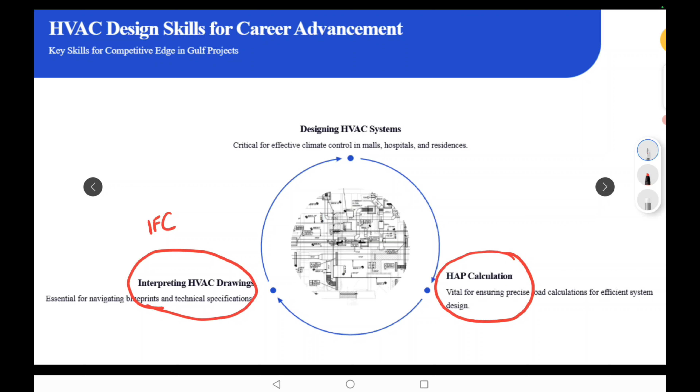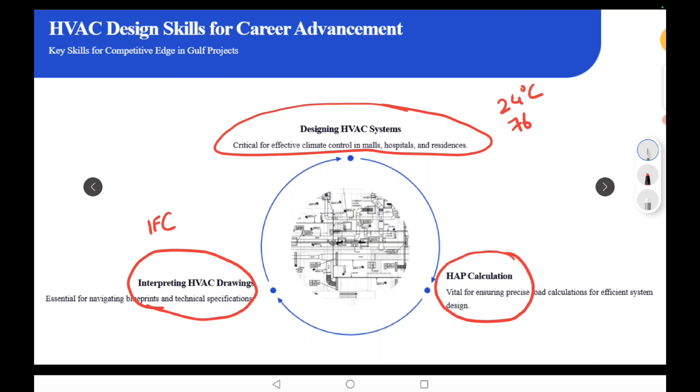The last stage for the drawing is called the issued for construction drawing, we call it IFC. Usually the comfort zone they specify is to maintain 24 degrees Celsius, or sometimes in Fahrenheit, 76 Fahrenheit, with humidity ranging at 50 plus or minus 5%. So there's a comfort level, but based on the client requirement this can be changed - you can design for lower data also.

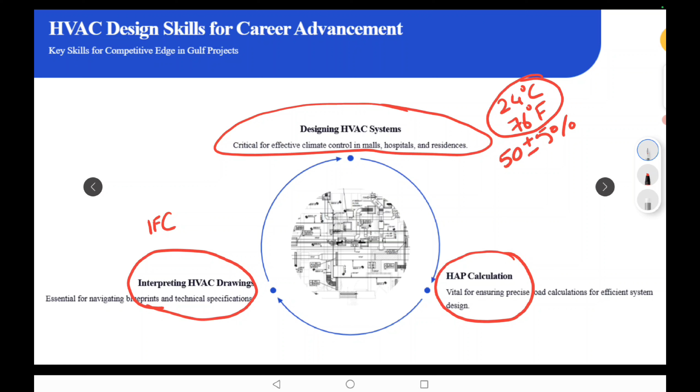Moving on to the next slides, we see the key skills required to be a good HVAC designer. As I was talking about the HAP software, this is the final result which comes once you do the calculation with the HAP. You can get all the data from January to December. You can see the total cooling coil load calculated for an area was around 99.4 tons, and then you have the sensible coil load.

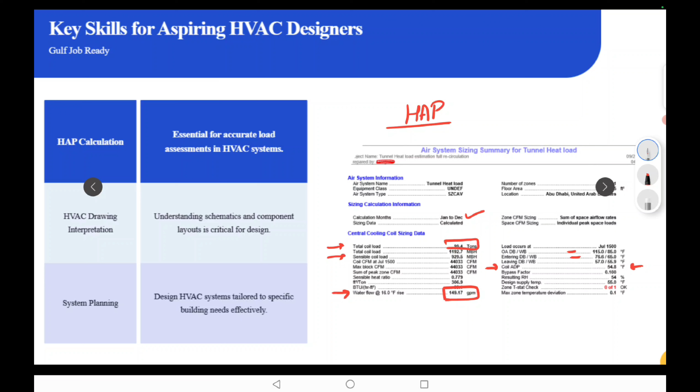Then you have a very important thing: how much amount of flow you need, given in GPM. And then a critical thing, you have to see the outdoor temperature at which it was designed, and the entering dry bulb temperature at which it was designed. The coil ADP is also very important - ADP stands for apparatus dew point.

Apparatus dew point. Now, as we have just discussed about the HVAC heat load calculation and HVAC drawings, we'll see why we need to interpret the drawings, and look at system planning, how we do the system planning. Before you start a project, you have to plan, you need to gather all the data.

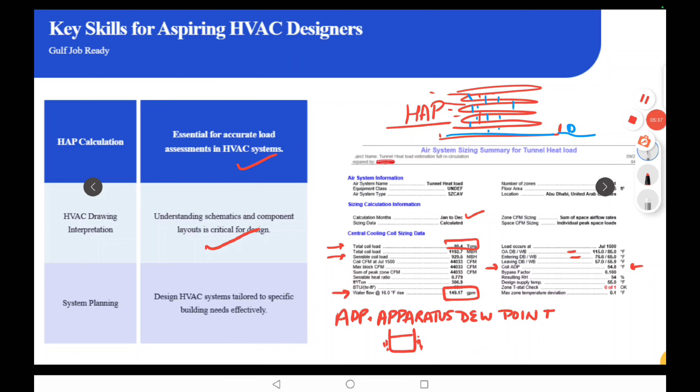Moving on to the next slide, we have the key maintenance skills that are important for securing the job. So you can see the importance of maintenance. Usually, any maintenance you do, the importance is to make sure the unit has optimal performance.

Then you have to understand the wiring and layouts, how you are going to troubleshoot an issue. You should know how to interpret the drawings, the control panel drawings, and the process drawings. In my first webinar, my first podcast, we told you that the language of engineers is drawing, so you should know how to interpret drawings, and the basics of the refrigeration cycle, how it works, to understand troubleshooting skills.

And the reason we do maintenance is just to increase the life cycle and increase the reliability of the equipment.

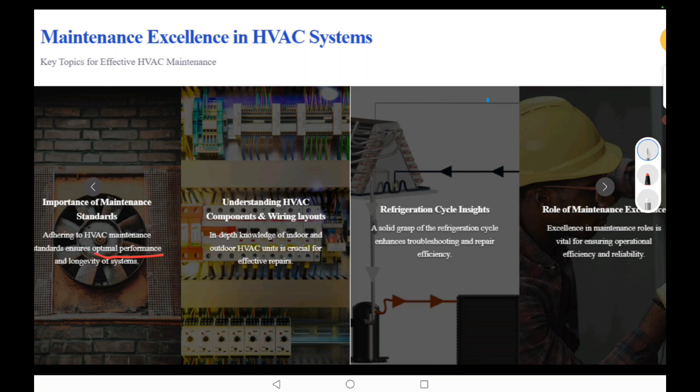Moving to the next slide, this is just an example. There are more units, but I wanted to show you the basic units you have. You have split ACs, window ACs, central ACs, chillers and district cooling plants. These are different types into which HVAC system equipment is divided. We have more in the market, like VRF and VRV, and then there are multi-split units.

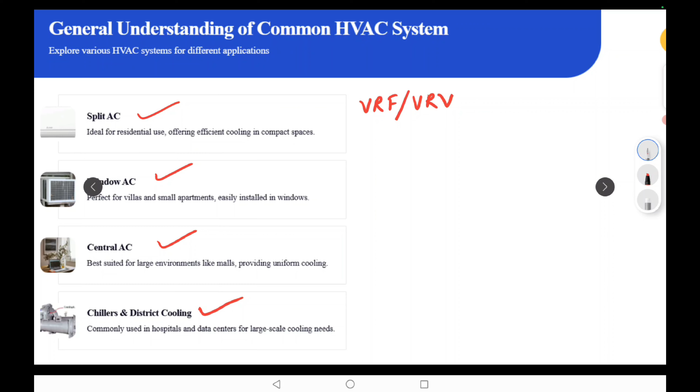So there is a split unit type, and then you can divide the systems, like AHUs, FCUs, the air supply units. It's a vast department with many components which we need to explore in future, and we'll explore each one by one in our upcoming videos.

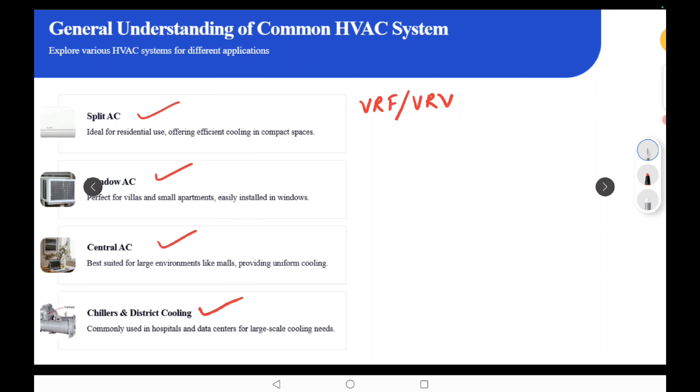So what are the essential maintenance skills for the Gulf job? You should have components knowledge, as I told you, the refrigeration cycle type knowledge and type of refrigeration. The refrigerant, as I mentioned, for example in general we use R134A, R410. We'll get into details about the suction and discharge pressure and where these refrigerants are used.

The HVAC tools, which are the critical tools we are using, and the high side and low side system knowledge for the buildings, like from the chiller side, and what is the installation part of the ducts and all this equipment, and some maintenance standards you should know. If you don't know, we'll make you aware of it in our upcoming videos.

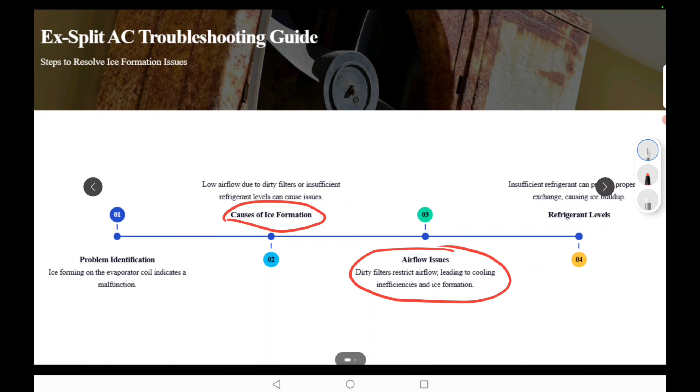So this is a general troubleshooting example. There was an issue of ice formation on the unit, and how you troubleshoot it. You have to go step by step, like checking whether there is a restriction in the filters, or a low refrigerant charge. Then the first step of solution is to clean the filters, charge the refrigerant, inspect the fan motor, and check if the fan is facilitating properly.

There are more other reasons also, for example the expansion valve not working properly. So I just give a small example. I know there are skilled technicians also watching this presentation, so they will ask about this reason also, that reason also. To give a small idea for the newly graduated guys, we just wanted to show one problem that mostly comes where you see icing on the system. We can explore more deeply, as there are more reasons why it happens.

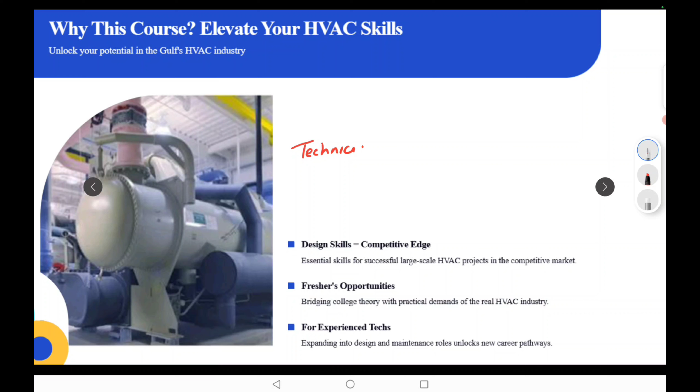So that's the first part, and then comes the second part. Now, why you should take this course and elevate your skills, and why you should subscribe to our channel and go through these skills. The design skills matter because everyone is aware of the technical part. The on-field technicians know about the unit and know how to troubleshoot it, but there is a bridge that needs to be made, which is the design bridge, to understand the system more effectively.

Once you have both skills combined, it's very good. And for the fresher graduates, we'll be teaching you both. In our videos we'll show you both, and focus more on the design part, which is very important for you to target engineering level jobs.

Yes, design skills are very important to understand how the system is designed. It's also important to know how efficiently you can troubleshoot it from the maintenance point of view. For designing a system for the construction part, you should know how to efficiently estimate the heat load calculation based on market standards, for example ASHRAE and ISHRAE standards. Over here, we are mostly using ASHRAE standards for the heat load calculation part.

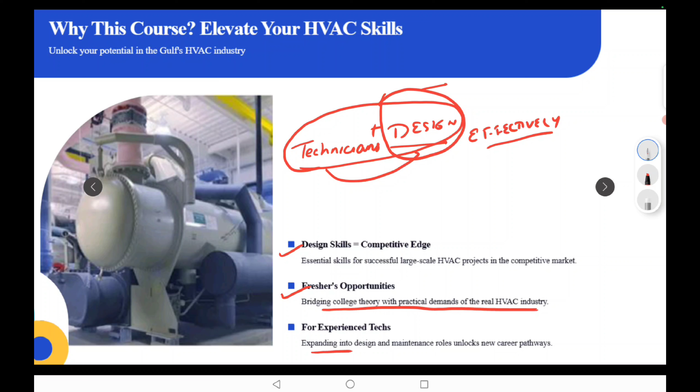So these are design skills. The fresher gets an opportunity to bridge the gap between college theories and the practical demands in the HVAC industry. And for the experienced technician, you also bridge the gap between the technical roles and design roles to troubleshoot the system effectively.

We will try to screen you once there is an interview. We can spend some time with you, have a meet or Zoom session where we can see if you lack any skills, and we can help you with that. The job market is very competitive, and the field of HVAC is very fast moving. It's very good to know about and enter this field and enhance your knowledge in it.

So just to conclude the full presentation, we talked about the design and maintenance skills that we need. It's a pathway for freshers and an opportunity for experienced technicians to learn more about design and get promoted to supervisor levels after gaining those design skills, and also to understand the system more efficiently.

Mastering the skills is a very important thing, so you can get mastery - it's just the same thing. For any other requirement or resources, you can contact our team, Mr. Akil, and he can give you more details on the upcoming schedules we have.